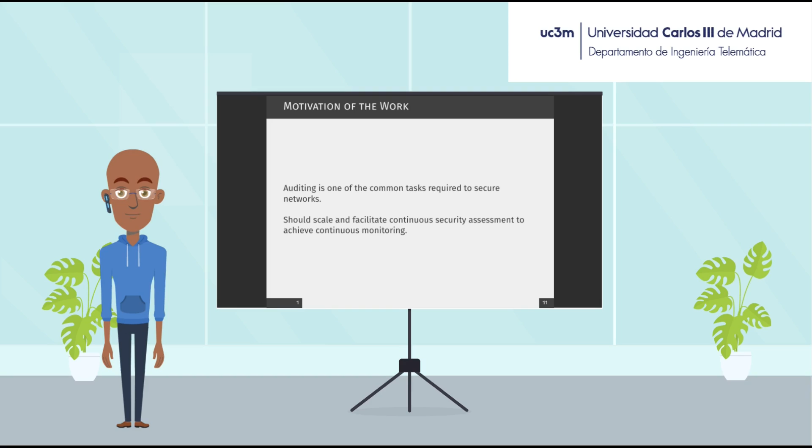Our understanding of this is twofold. On one hand, the necessity of establishing a link between the assets inventory of the companies and the auditing processes. On the other hand, auditing should follow an automatic or semi-automatic approach.

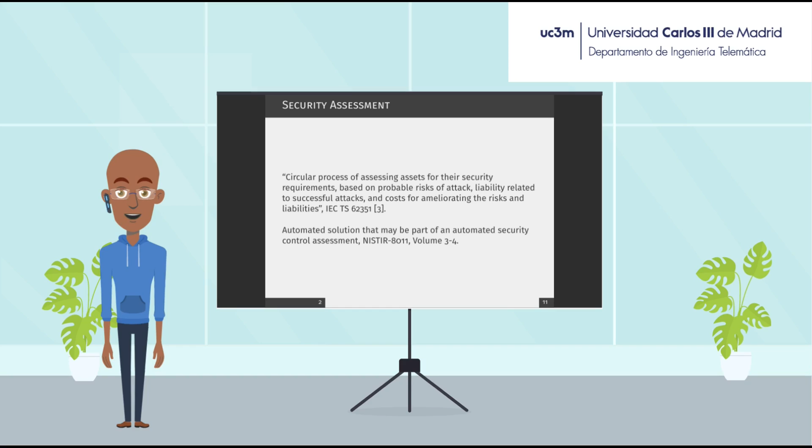Security assessment is defined as a circular process of assessing assets for their security requirements based on probable risks of attack, liability related to successful attacks, and costs for ameliorating the risks and liabilities, according to the standard developed for handling the security of power systems and associated information exchange, standard IEC TS 62351. This paper addresses an automated solution which may be part of an automated security control assessment, as described in NIST IR 8011 volumes 3 and 4.

The U.S. National Institute of Standards and Technology and the Department of Homeland Security are working in defining capabilities of automation support for ongoing security control assessments, such as software asset management and software vulnerability management. Software asset management is defined as part of the continuous diagnostic and mitigation process. Its main purpose is to control risks created by unmanaged or unauthorized software installed on a supervised network.

The authorized software installed on every device is inventoried, and every software asset is usable and automated, being described in terms of Common Platform Enumeration Names. CPE is a standardized method of describing and identifying classes of application, operating systems, and hardware devices present among an enterprise's computing assets. Software asset management supports vulnerability, configuration settings, and hardware asset management.

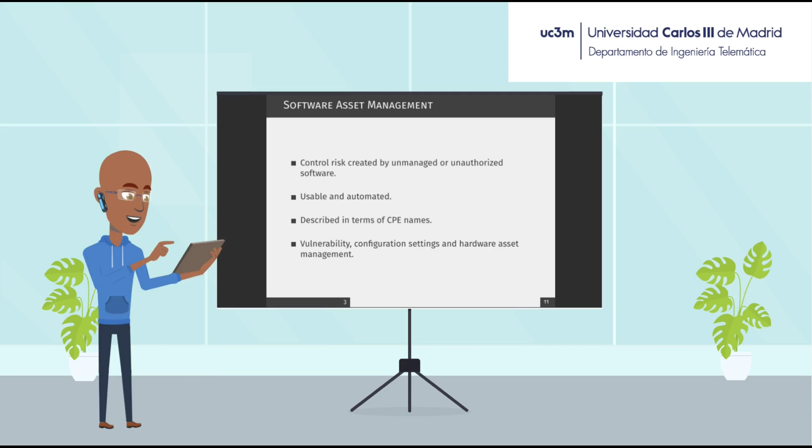Software vulnerability management addresses defects present in software on the network. Once software and hardware are part of the inventory, software vulnerability management capability supervises software vulnerabilities in the company's software in order to manage and patch them in an appropriate manner.

Software vulnerability management manages and assesses two kinds of software flaws: the Common Weakness Enumeration, which mainly come from poor coding practices, and the Common Vulnerabilities and Exposures, which is a list of publicly disclosed vulnerabilities, those coming from working with software providers, vulnerability coordinators, bug bounty programs, and vulnerability researchers.

Researchers, developers, and industry have developed tools for automating these capabilities. We have studied a number of them in this work, as you can see in the comparative table. In the table, only 4 of them show support for full automation. Lynis, which is restricted to auditing of Linux, Mac OS, and other Unix-based systems. CROZONO, which was an exotic approach to do the auditing of wireless networks using a flying drone. Intrigue Core, which limits to vulnerability discovery but not performing the exploitation and post-exploitation pentesting phases.

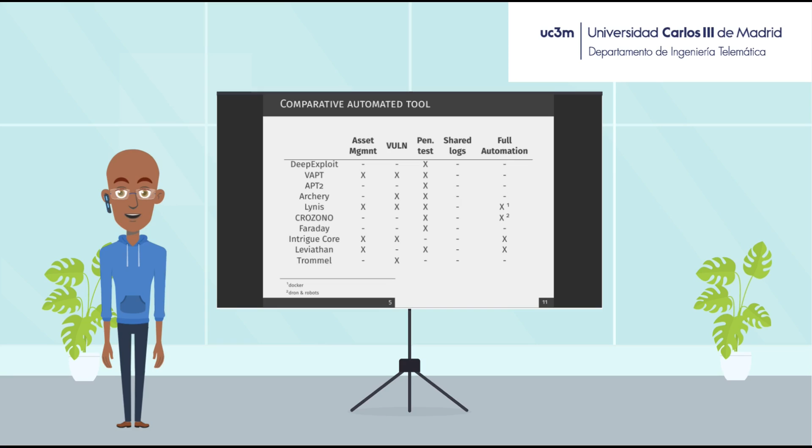Cyber threat intelligence challenges organizations since none by itself has access to sufficient information for accurately addressing the threat landscape. Sharing cyber threat information among trusted partners and communities alleviates this situation, thus the importance of shared logs capability.

Let's review the requirements of Auto-Auditor, the automated auditing system we propose for power grid companies. We have identified 8 requirements, 4 in this slide and 4 in the next slide. So first of all is testing heterogeneous devices. The system we propose should be able to test a wide range of device types, from smart meters to networking elements and many other limited devices, and also laptops, normal computers and high-end computers.

Second requirement is fingerprinting equipment under test, so fingerprinting devices. Due to the great variety of devices in the network, the system should be able to perform a semi-automatic fingerprint of the device that will be supervised by the company to achieve a highly accurate fingerprinting.

So the idea is that such fingerprinting could be used to update the company inventory. Third is include known vulnerabilities under metadata. The system should feed itself with the potential vulnerabilities databases, such as open source databases like CVE, CVE Details, etc., and gather the vulnerability and severity information metadata.

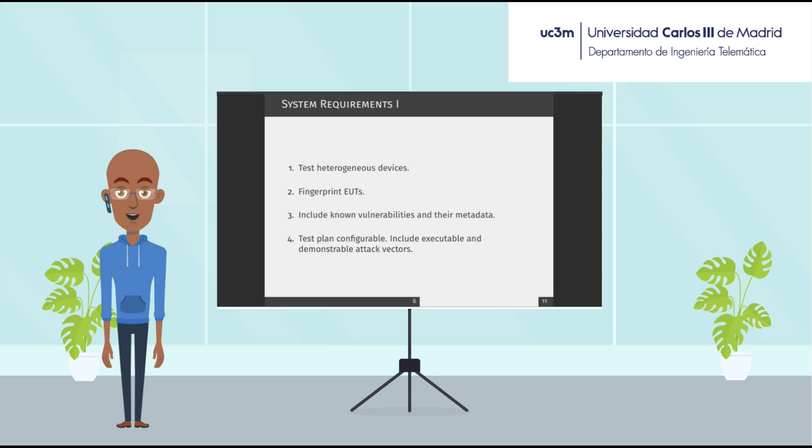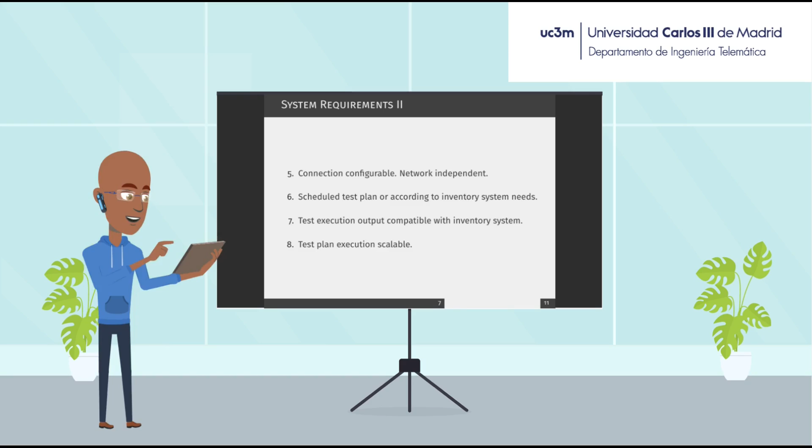Requirement number 5 refers to the connection. The proposed system must include the capability of defining configurable connections, including different network parameters for running the different tests. Requirements number 6 and 7 refer to the link with the inventory system, so that the test plan can be manually or automatically executed, or even better, scheduled from the inventory system. That may require instantiating connection elements according to the defined connection configuration. The test execution output should be compatible with the inventory system. And finally, the number of required test executions may involve a large number of resources, but it must scale with the number of devices.

Let's briefly review 3 aspects of the system design. We have chosen containers over virtual machines because they are lightweight and start-stop faster. Regarding the connection configuration assistance, we have identified 4 different scenarios. First, to provide physical access to the devices. Second, to provide an exact copy, the container or virtual machine of the device. Third, to set up a secure connection with an external auditing system. And the last scenario is to execute the local auditing system in the company's network. Since the last scenario scales better, we have chosen it as a cornerstone in AutoAuditor.

Regarding vulnerabilities, we are using CVE scanner, the result of a previous work. The scanner performs a fingerprint of the device and outputs the vulnerability of the detected product and versions. We consider the CVE reference plus the severity according to CVSS 3.x metrics. That metadata is incorporated in the database of vulnerabilities and linked to the inventory entries.

So, how does it work? What is the workflow of AutoAuditor? Well, it starts gathering information with CVE scanner. It's imperative to conduct an initial scanning phase in order to gather all information of the environment needed for the attack plan. The data from the CVE scanner provides a fingerprint of the devices in the network to identify potential vulnerabilities. Right after identifying potential vulnerabilities, the next step is to build the attack plan to exploit such vulnerability. An attack plan can be generated using AutoAuditor or manually created in the correct format. AutoAuditor allows execution of attacks through VPN if an OpenVPN configuration file is provided.

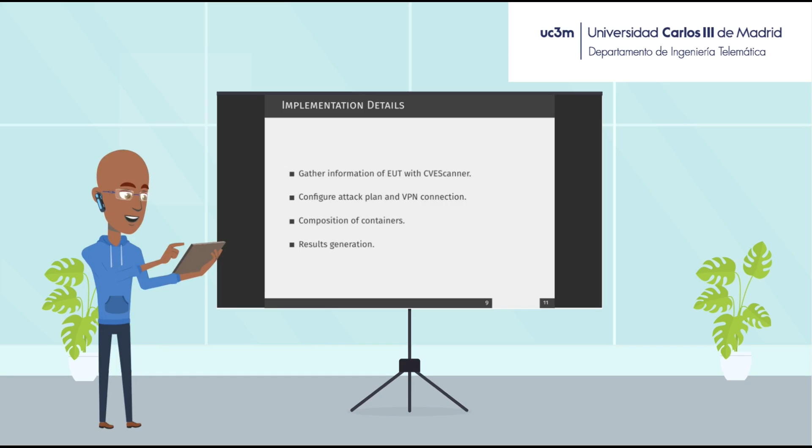The previous steps may be executed at an outsourced security company, but the remaining 2 steps must be executed at the power grid company. AutoAuditor will start a container with all the necessary tools to carry out the attack. If an OpenVPN configuration file is provided, another container with an OpenVPN client will start to serve as pivot to execute the attack. After the attack execution, results are collected for introduction in the inventory system. So to test the correct behavior of the system, we have developed a closed environment including the devices, the VPN server, and the application performing the audit.

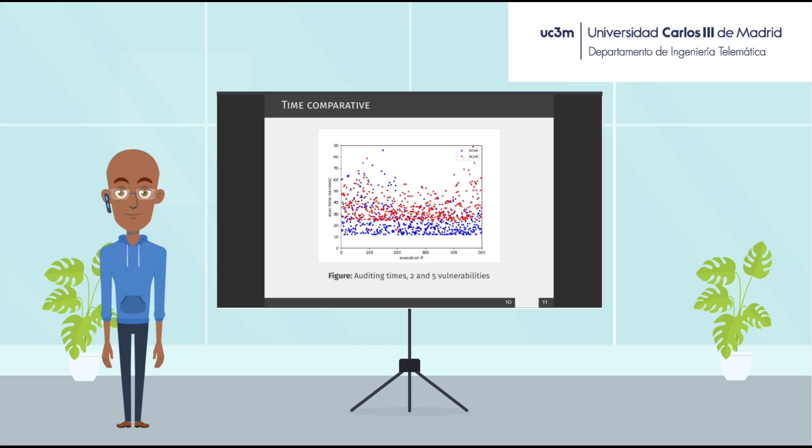Figure 1 presents the execution times of 2 different experiments. Blue dots represent different runs of the AutoAuditor with a test plan of 2 vulnerabilities. Red dots correspond to a test plan of 5 vulnerabilities. In the figure we can see a high number of outliers. This is mainly due to the nature of the exploits. Sometimes it takes a lot of tries to compromise the target. Sometimes only a few are required. The first execution will take a high execution time due to the download and instantiation of the container images.

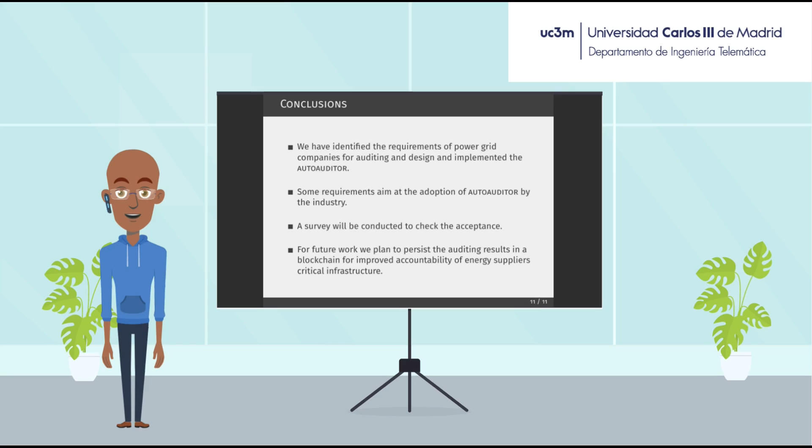To conclude this work, we have identified the requirements of power grid companies for an automatic auditing system, and we have designed and implemented the AutoAuditor. Thanks to the reviewers, we reckon we missed one requirement, which is adoption of the AutoAuditor by the industry and how to foster this adoption. So, besides our open source strategy, we plan to conduct a survey to check the acceptance. Finally, for future work, we plan to persist the auditing results in a blockchain for improved accountability of energy suppliers' critical infrastructure.